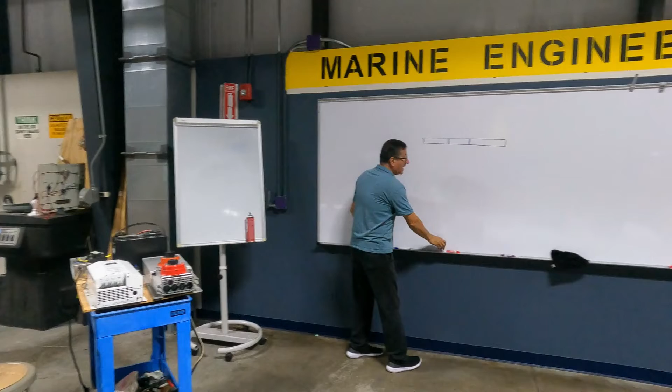Suppose that I have a piece of iron, guys, the piece of iron, and I am going to insulate one segment of the piece of iron with plastic, with a heat shrink, and I am going to wrap a coil over there, and bring the beginning and the end of those wires here outside.

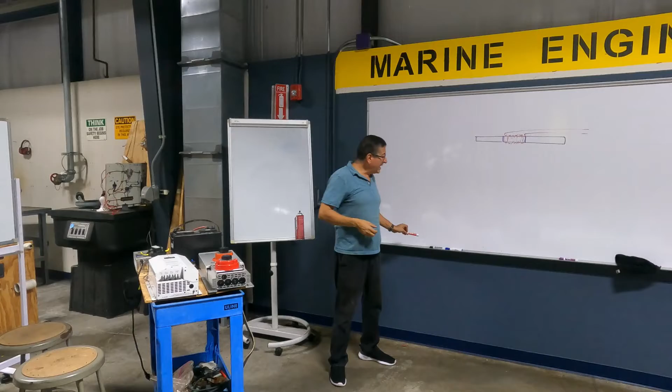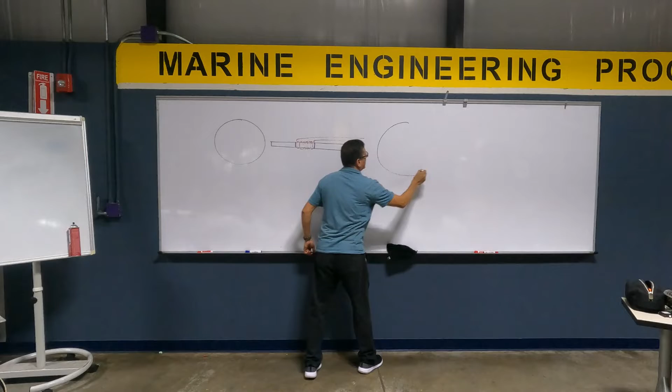And I am going to prepare a couple of metallic washers. I have one metallic washer here, and another metallic washer here, equal diameter, and the same diameter in the center equal to the diameter of the shaft. Look at this.

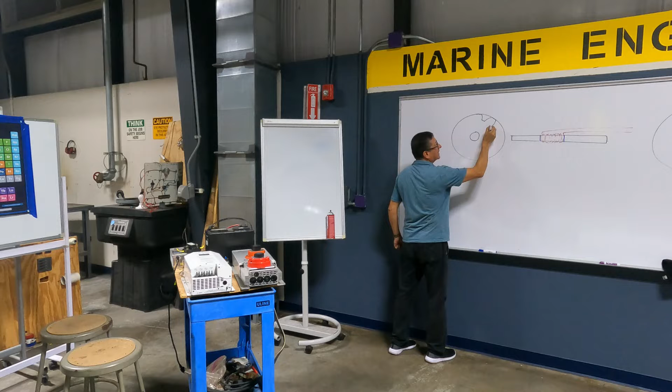Suppose that I cut some sections in both washers. I cut it, yeah? I cut those sections in both sides.

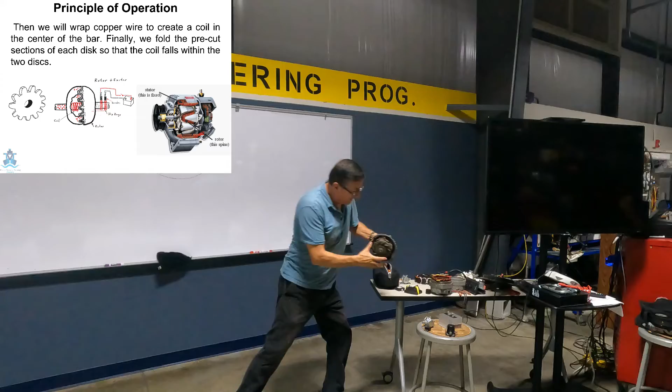And I am going to weld those pre-cut washers here. And after that, I am going to bend those parts. And finally, I have that situation - you see, this one is bent, the other one is bent, and the coil is inside.

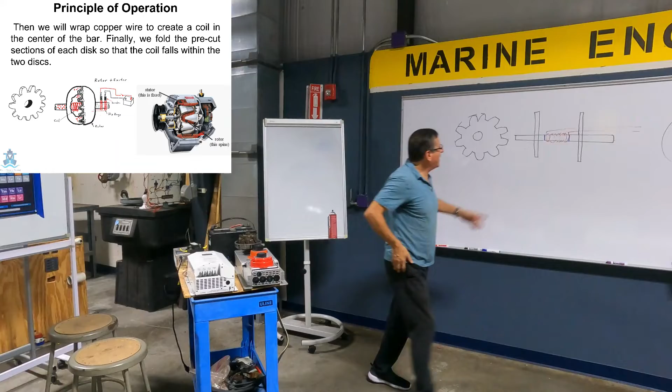Anybody follow me? Yeah. Now I have this situation: this one is bent here, this one is bent here, and I have pieces of metal like this, and this one enters here, and this one enters here.

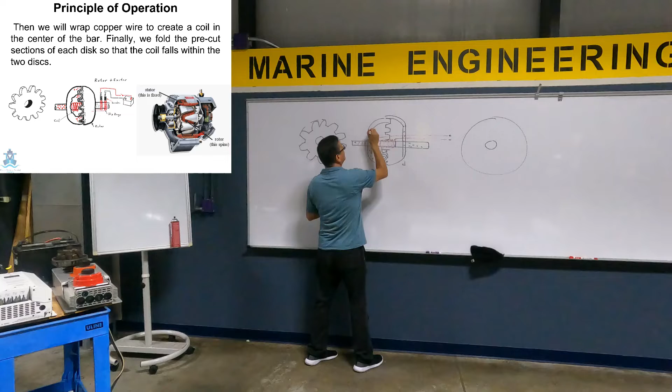One is positive, negative, positive, negative, positive, negative - both of them bent like this. These ones are positive because this side is positive, and this side is negative, because this one is connected to the battery, to the positive and the negative, and this piece of metal becomes a magnet. This washer will be the negative washer, and this washer will be the positive washer - so you have positives and negatives, magnets.

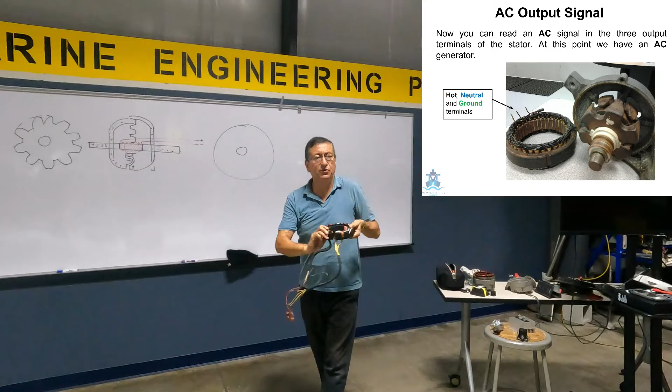And after that, I am going to create a coil. How do you create the coil? You create it this way: you start with one wire, continue, continue, continue, continue, and finally you have both wires, positive and negative - the beginning and the end of the coil.

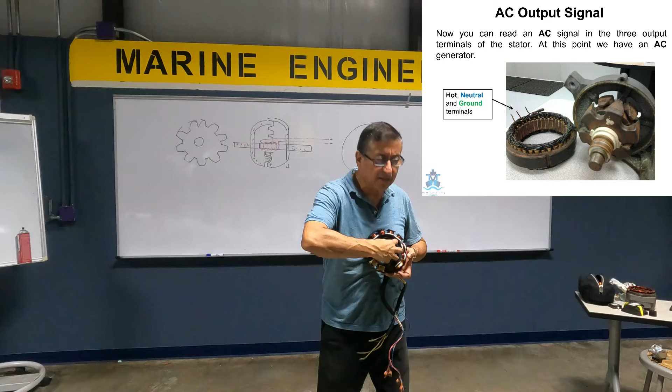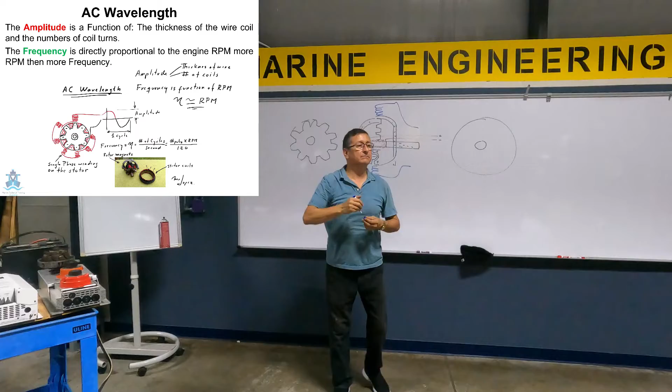This is a coil, and I am going to rotate the magnets in the center. I have the coils here, here, and here. What happens when the magnets rotate in front of the coil? The coil produces current - this is hot, this is neutral, and this is the ground. The coil produces AC current.

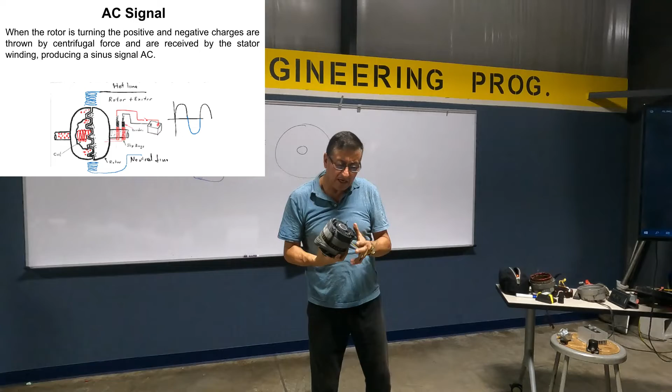Now I enter that AC current into a group of diodes, organized with capacitors, and rectify the AC current into DC. At the end of the day, after the current passes through the rectifier and the voltage regulator, you have positive and negative, positive and negative. If this alternator is for 12 volts, the output will be 14.2, 14.3, 14.6 maximum. That's okay?

Yes, internally the alternator produces AC current, but at the end, between this and this, it's DC current. For that reason, the alternator is considered a source of DC.

Can I put a handle here like this and move it with my hand? Yes - but what happens in 5 minutes? Or can I connect this to my bicycle, and pedal it? Yes. Or can I connect a turbine here and put a jet of water on it? Yes. Or can I put a fan here and use it for a windmill? Yes, you can spin the shaft.

Can I connect a small gasoline engine? Yes, my friend, and you produce AC current, and after that, DC. You understand? This is a generator. Can I connect a turbine here and a boiler here - the water boils, produces vapor, and with the vapor, spins the turbine? Yes, there are millions of possibilities.

But this is a small generator. How do you bring the current here in the middle? Follow me: you have a plastic washer, and you have another plastic washer here, and those plastic washers are covered with copper rings, similar to the ring that you have on your finger.

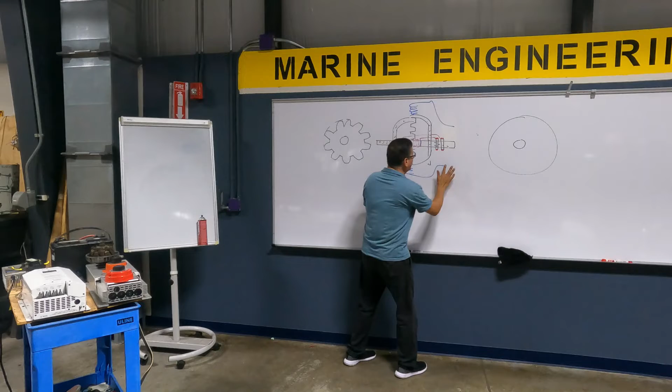Everybody follow me? In each copper ring, I connect one end of the coil. Now the copper rings are connected with pieces of carbon, and those carbon pieces have a spring here. One of these is negative, one is positive, and this one is connected. You remember the switch? This is ignition, this is start, and this is battery.

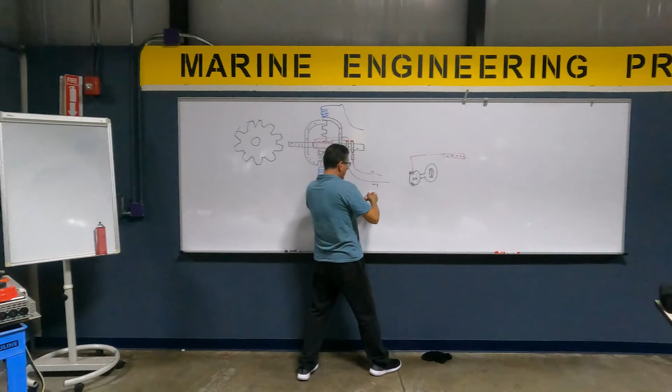The ignition switch receives power from the positive battery bus bar. This cable will be purple, connected to the ignition. And this one is the ground, connected to the ground of the battery.

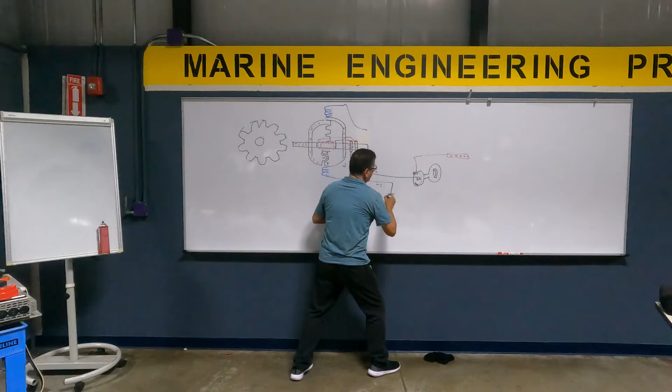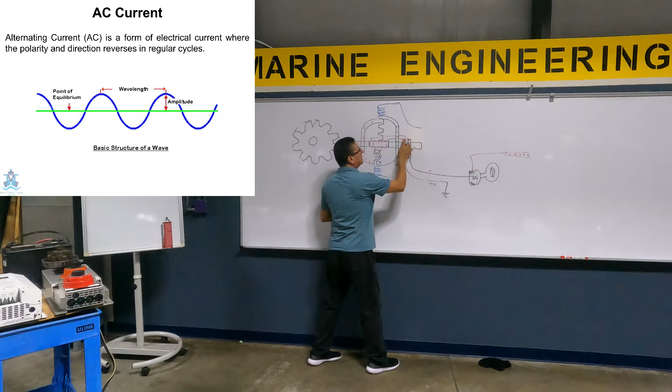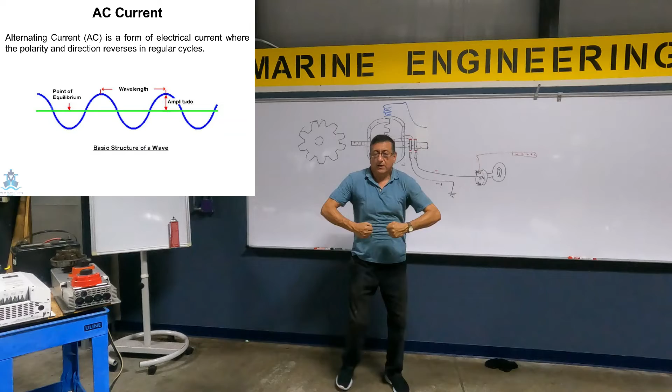When you activate the ignition switch to the ignition position, you bring current to the coil in the middle. What happens with the metal? It becomes a magnet. Pay attention: I bring current here into the carbon, the graphite touches the metal rings, and when the metal is powered, it powers the coil. When the coil is powered, those metals become positive and negative. Depending on how strong the magnets are, when they are spinning, they produce AC current.

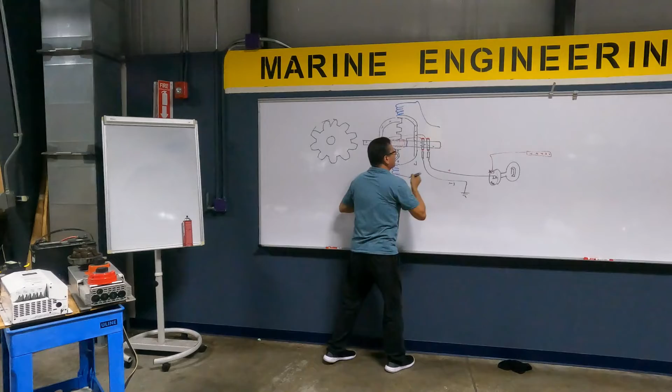What is the name of this current coming through these brushes? Those are the brushes, this is the excitation. It enters here, activates the coil, and the coil produces the magnets. This area is the exciter. All the motors and alternators have slip rings, and the brushes enter here.

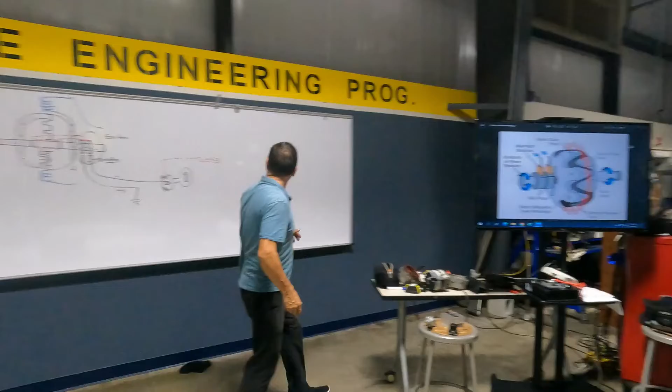What happens, guys, when I have oil or contamination between the carbon graphite of the brushes and the slip rings? The excitation is low, poor excitation. And what about the output voltage? It's not good. For example, look at this - thank you, Dan - this is the slip rings, you see? And the brushes enter over there.

I have a question: my alternator, I put my car in a shopping center in front of a glass window, and I see the lights of my car. When I accelerate the motor, I see the intensity of the lights is good. When I decrease the RPMs in the motor, the intensity of the lights decreases. What is the meaning of that?

Excitation is not good, the brushes are contaminated with oil. If you accelerate a lot, the contact is good. If the acceleration is low, the contact between the brushes and the slip rings is not good. It's poor excitation.

You need to remove the alternator and send it to the machine shop, they remove the brushes - oh, the brushes are worn. They replace the brushes with new ones, and with sandpaper they clean the slip rings. New brushes, clean slip rings, start again. Oh wow, good intensity, you understand? It was bad excitation, poor excitation.